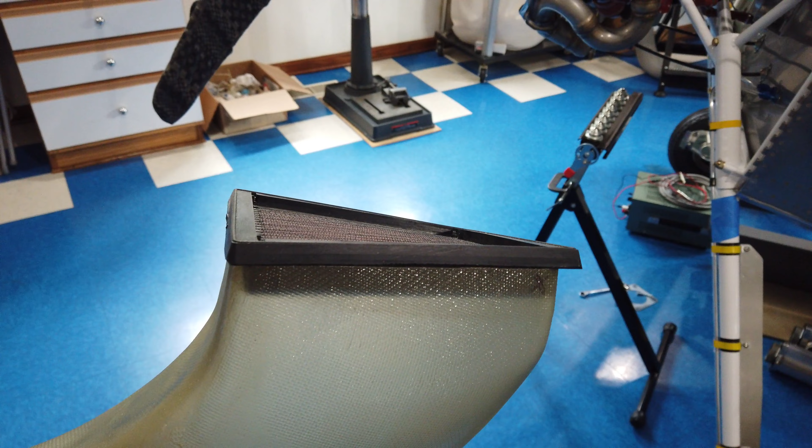So real quick, I just want to demonstrate the weird cuts that are on this snorkel. So I've temporarily just thrown the filter into it, and you can see when I rotate it how that filter sits nicely inside the snorkel all the way around.

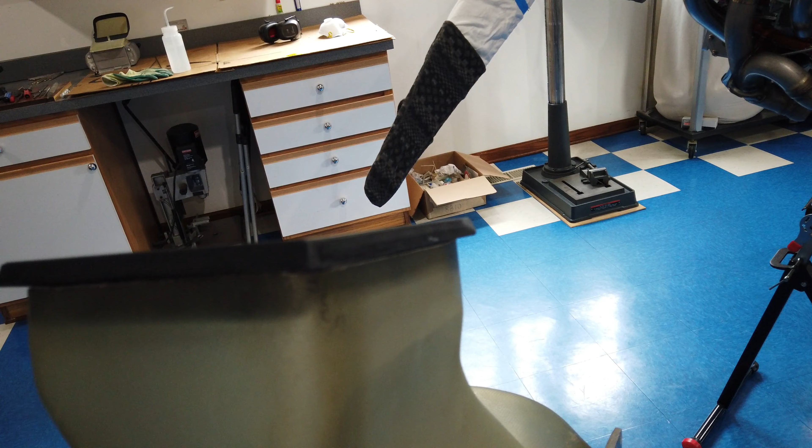But you can also see how obviously the snorkel has not been cut perfectly flat. You can see what I was talking about, how it runs uphill in this front corner, this front right corner right here. And that's because it's matching the bend in the forward ramp. But the filter has no problems contorting itself to match.

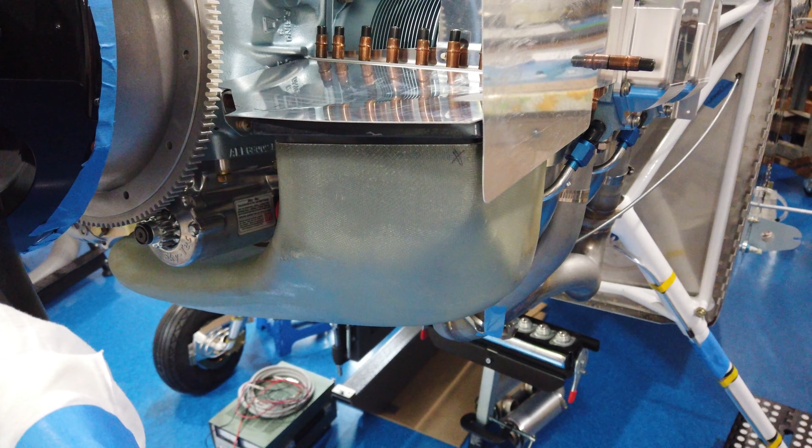All right, so here's an example of how quickly things change. I had just talked about having the snorkel up against the inlet ramp, and then you trace around it. Once you have it traced, then you can come down. The instructions say come down 3/8 of an inch from the inlet ramp, and then you could mark the actual snorkel itself to cut it.

So again, I just talked about having the snorkel in place, and with it touching the ramp, you trace around it to make a mark on the ramp. That's the hole that you're going to cut in here. Once you have that marked, then you can go ahead and trim the snorkel itself down 3/8 of an inch.

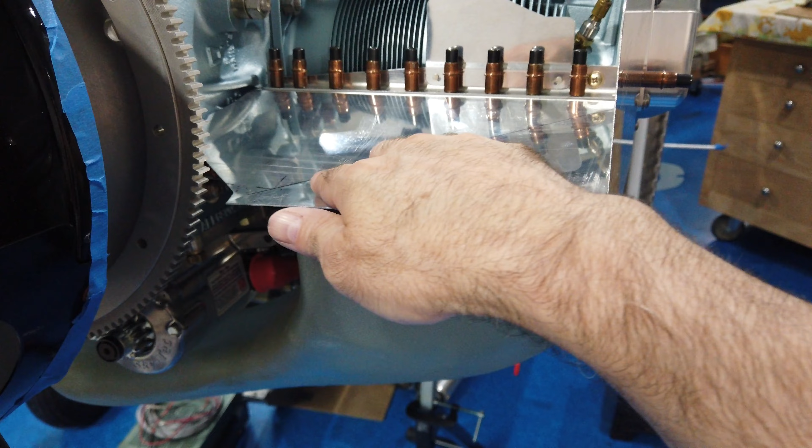But I realized that the filter has to fit inside of this ramp from the top, the entire filter. The top of the filter is going to be flush with the inlet ramp. It's not going to sit into the ramp with the outer edge just laying on top. So that means this opening has to be cut to the outside diameter of the filter.

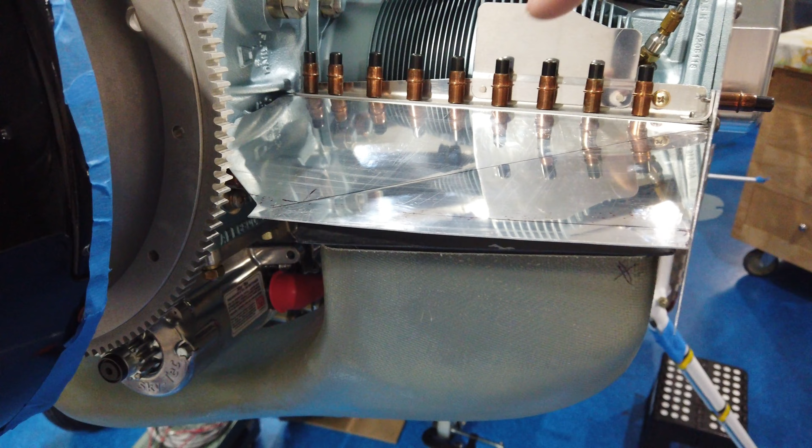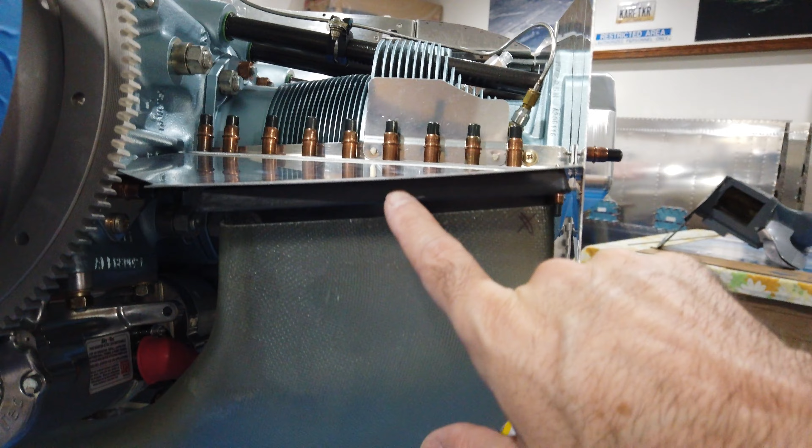You can see from the video that I just shot, the filter sits inside of the snorkel, but this edge of the filter is way larger than the snorkel. So it's this edge here that you have to trace, the filter edge, not the edge of the snorkel.

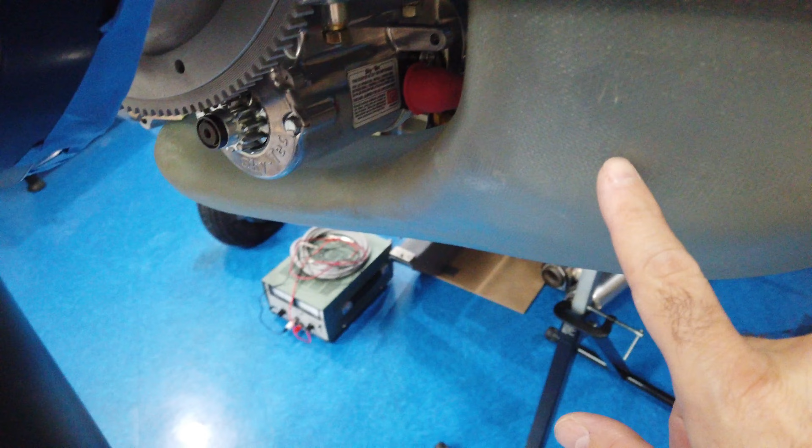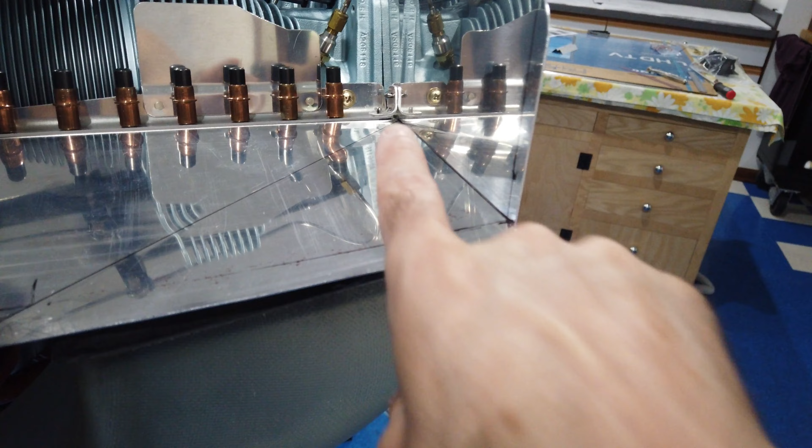So I went ahead and once again bolted the snorkel in place with the gasket down here. Got it in position, got the ramp and the sidewall in position. I keep checking my reference marks that I had drawn to make sure that this is still in alignment. And now I've got the filter installed in the snorkel, and I have it pushed up against the bottom edge of the inlet ramp all the way around.

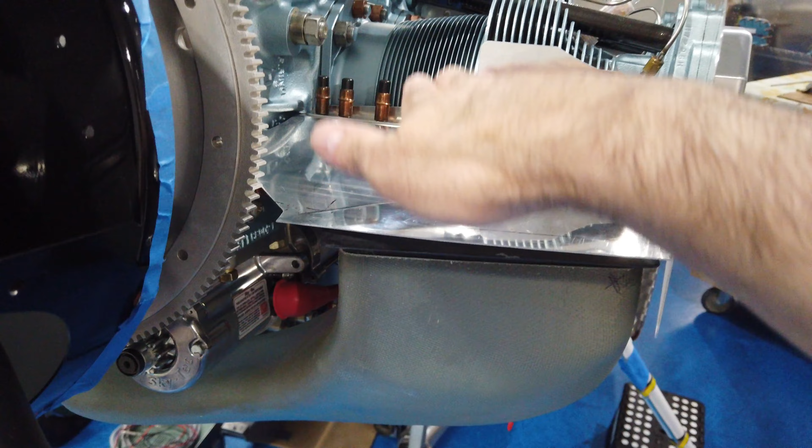And now I'm going to trace around the filter. And that will give me the opening that I need for the filter to sit inside of the ramp.

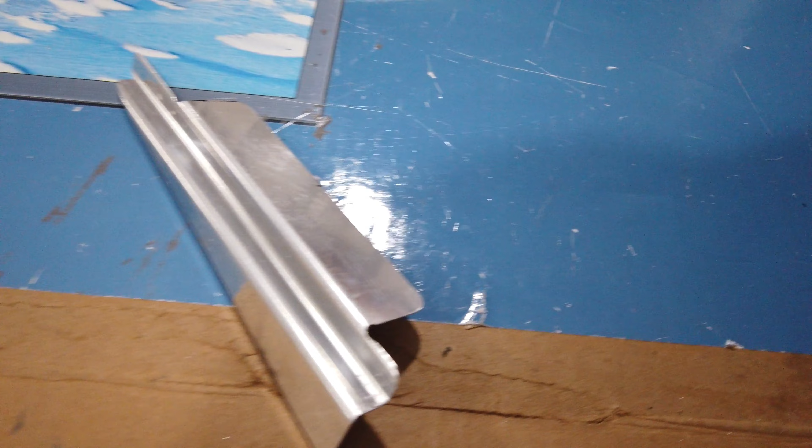Howdy, everyone. All right, working on the snorkel filter bracket stuff, and also a little bit more baffling work, just because they're all kind of interconnected at this point. So is the cowling. But anyway, the kit for the snorkel, these are the written instructions here. There are a couple of pages of written instructions, and there are a couple of photographs, and there are also

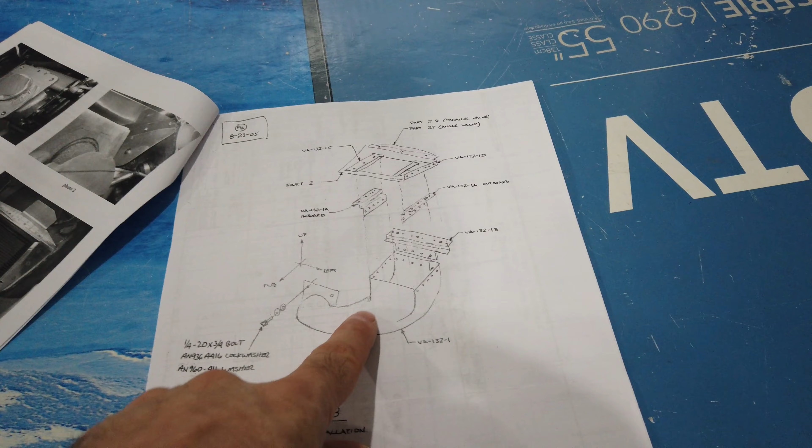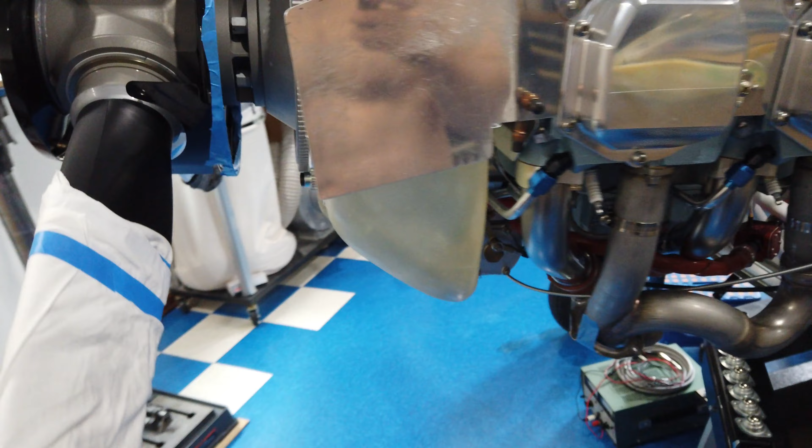a couple of drawings. So like I had said, I was fitting the actual snorkel to the engine, getting where it connects to the servo and where this open face relates to the bottom of the ramp. So I had talked about working on the forward ramp and getting the various angles bent in here so that that will interface with the opening of the cowling.

Once that was bent correctly, then you start fitting the snorkel again to the servo and to the underside of this ramp area. Since the ramp was bent to fit the cowling, now you trim the snorkel to fit the bottom of the ramp. So that's why, like I had showed you in the other video, this has got a weird shape to it. You can see it runs downhill this way.

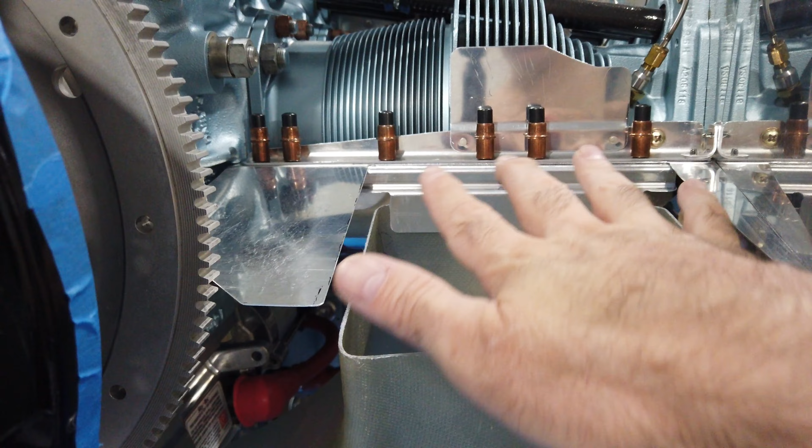From this corner to this corner, it runs back uphill. Across the back is pretty straight. And then from this back corner to this front corner, it runs uphill again. So it's got an odd shape to it, but it matched the contour of the ramp, and that was bent specifically to match the contour of the inlet on the cowling.

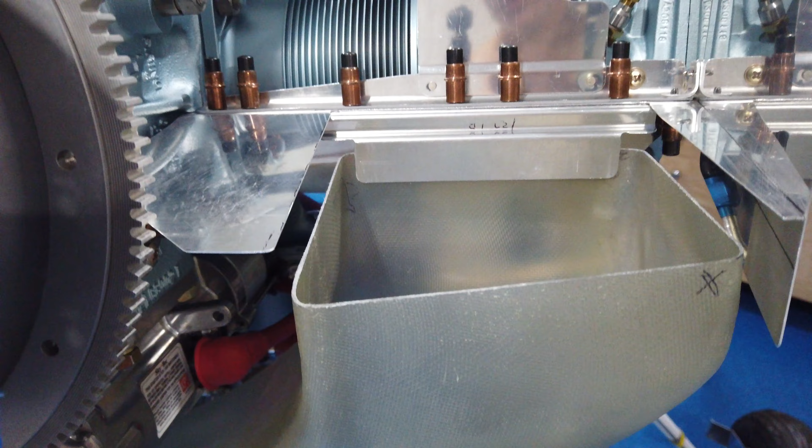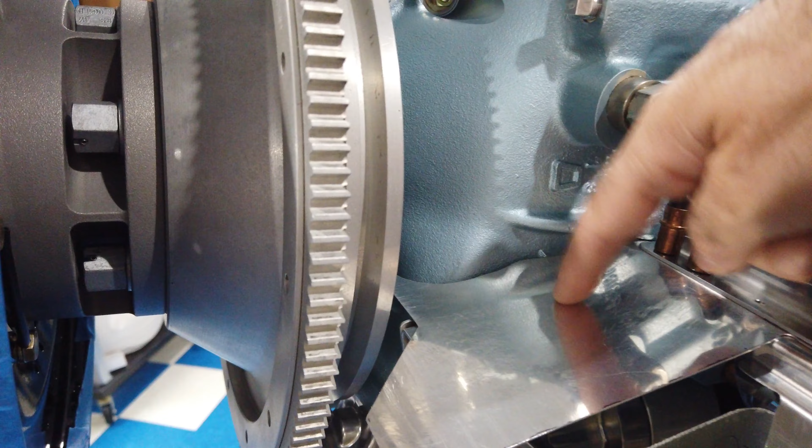But you can see now that I'm starting to fit the filter, that ramp area that you just bent all gets cut away. But you need to do that first because, again, that dictates the shape of the snorkel, and this shape will now fit the cowling, even though most of the ramp is now gone. Don't forget, you've already installed the bracket underneath this piece of the ramp. That's why this is solid now.

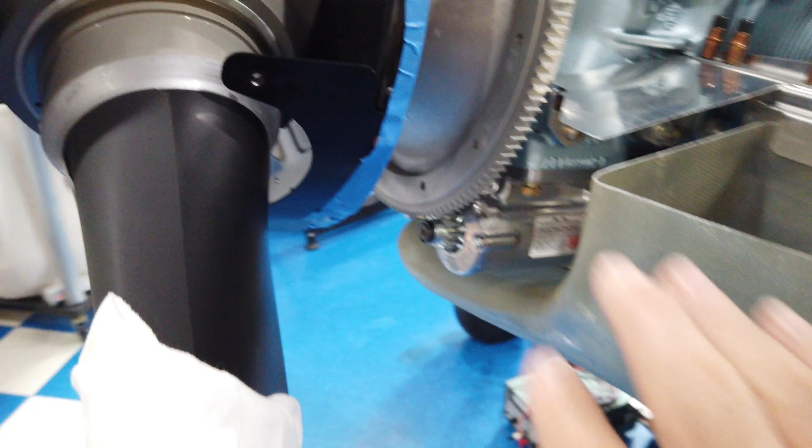It's not attached. I haven't riveted it yet, but again, this gets bent to match the cowling opening, and then you fit the bracket that's underneath this to match the ramp. So this bracket now holds this part of the ramp in its proper location. This has already been cut to its proper shape according to the ramp that used to be here. And then, of course, we still have our reference marks on the sidewall here.

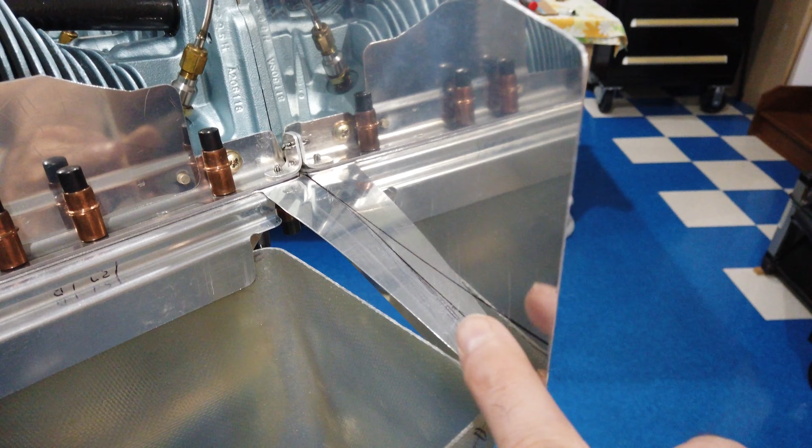Can I get in there? These reference marks here on the sidewall is where you need to line up this edge of the baffles, and that will make sure that this still continues to line up with the opening on the cowling. Don't get rid of your reference marks.

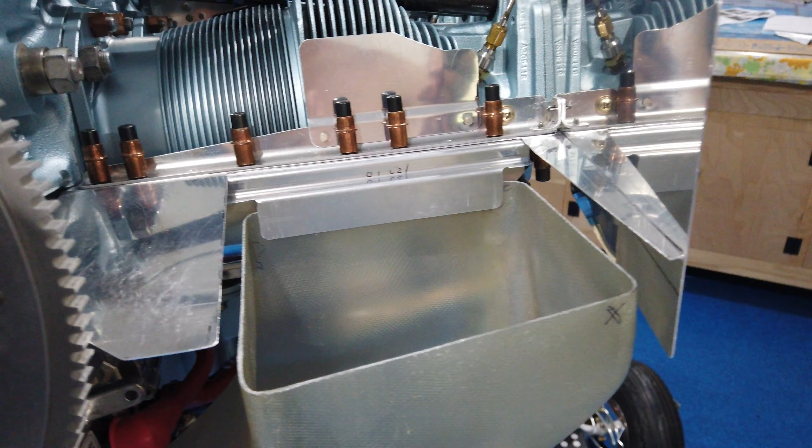So what I'm doing now is I'm fitting the filter, and I'm fitting these brackets. These brackets, they come as a solid piece, more like this and this. And this one is the one I'm working on now, so it's already been cut and shaped a little bit. But you can kind of see the profile. It's basically just a step.

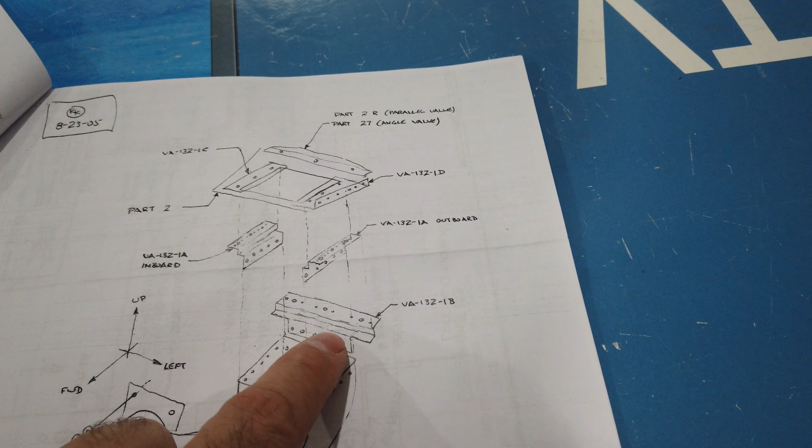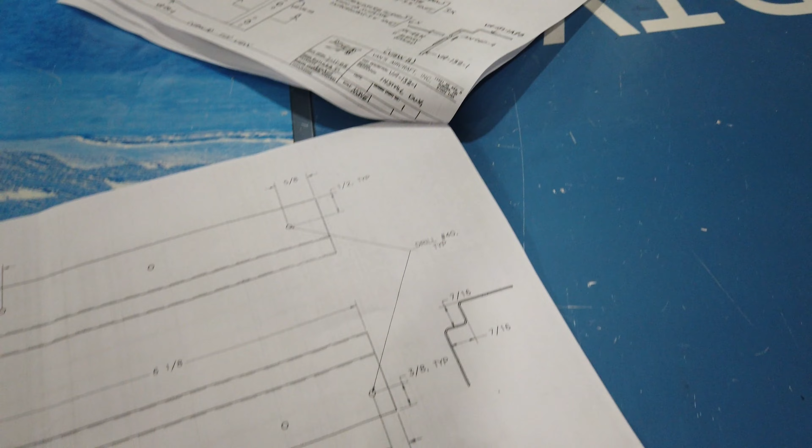And I'm just starting to fit these. These are what the filter actually will rest on. So there's one in the back and there's one on each side. And that's what the filter rests on. There are drawings. Here's another sketch here. These drawings are a good reference. I didn't use these for any real measurement. But they're a good reference.

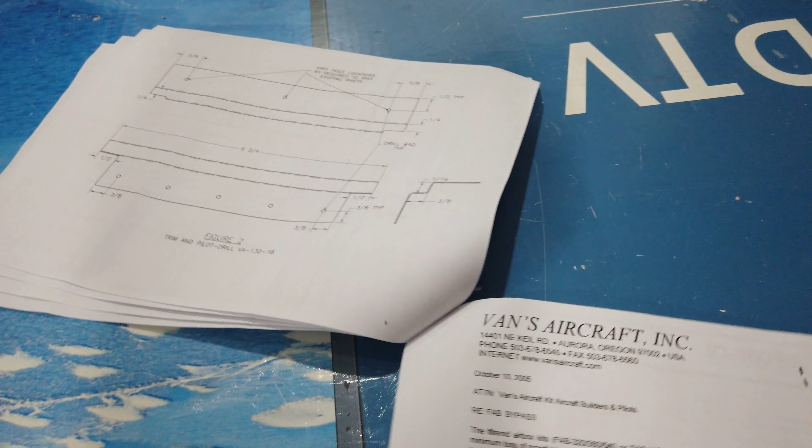And this one, I'm trying to clarify this if I can get these stupid pages separated. Okay, so this is something that confused me for a little bit, but I've got it figured out. If you look at, gosh, this sucks. I should have put this on a tripod.

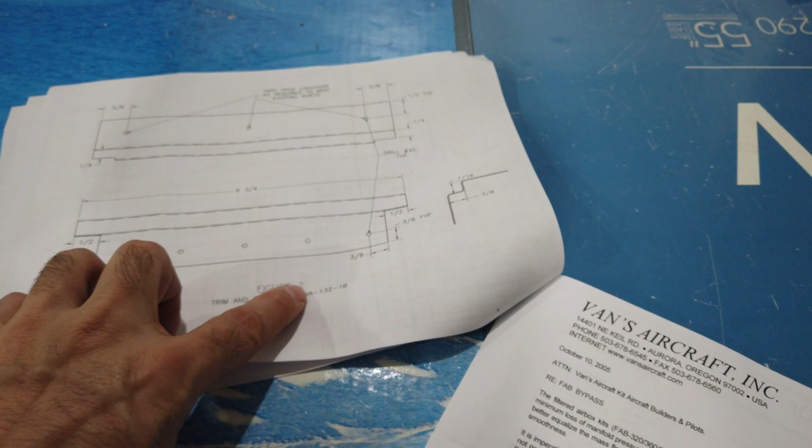You look at this drawing here. You've got a 1 Bravo for this back piece, and then both of these side pieces are a 1 Alpha. All right. When you look at these drawings, figure 2 is for the 1 Bravo. Figure 1 is for the 1 Alphas. What you want to make note here is the profile. So here's a profile sketch.

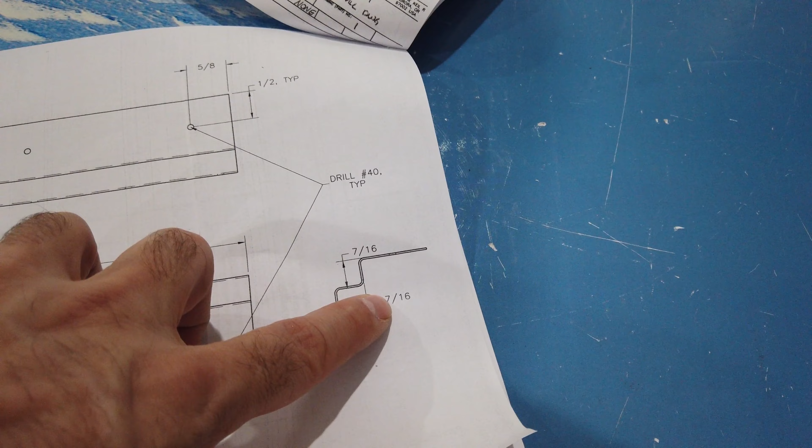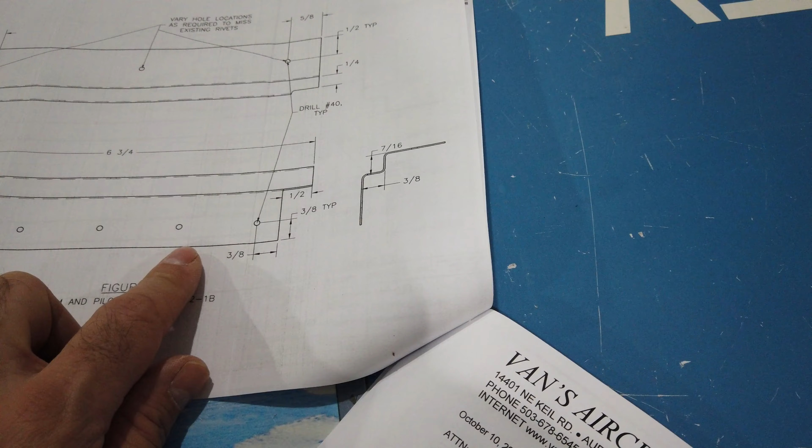The 1 Alpha piece, the step is square. It's 7/16 by 7/16. The 1 Bravo piece is not. It's 3/8 one dimension and 7/16 the other dimension. Make note of that and make sure you orient this piece with the 3/8 and the 7/16 correctly. And that's shown here. So this lip here, this is the lip that goes down inside of the snorkel. So the 3/8 lip is what the filter actually sits down on.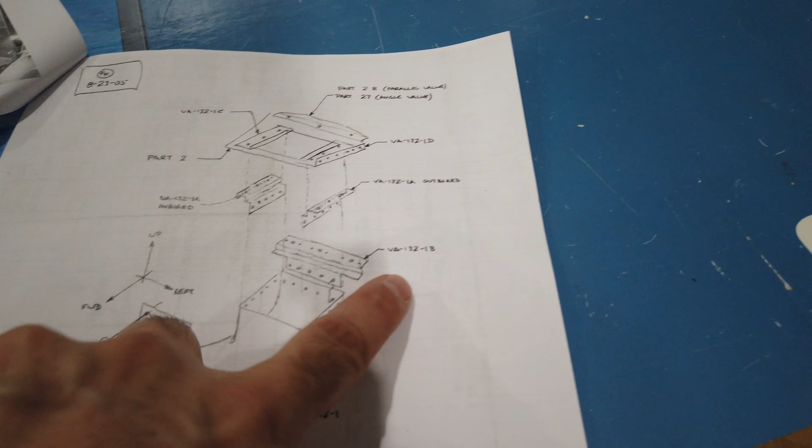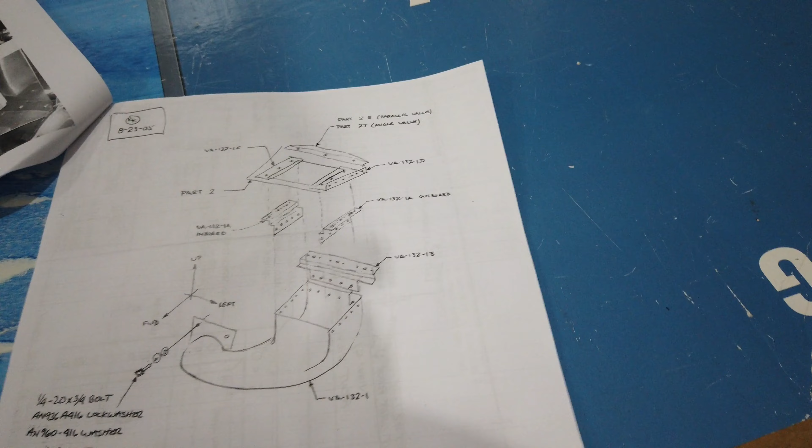All right. You can kind of see that if I go back here. So this is the 1 Bravo. This edge here is what fits down inside of the snorkel. And then this edge of the step is 3/8. That's what the filter actually sits on. And then the back wall of that step is 7/16. All right, so pay attention to that when you're cutting up your pieces.

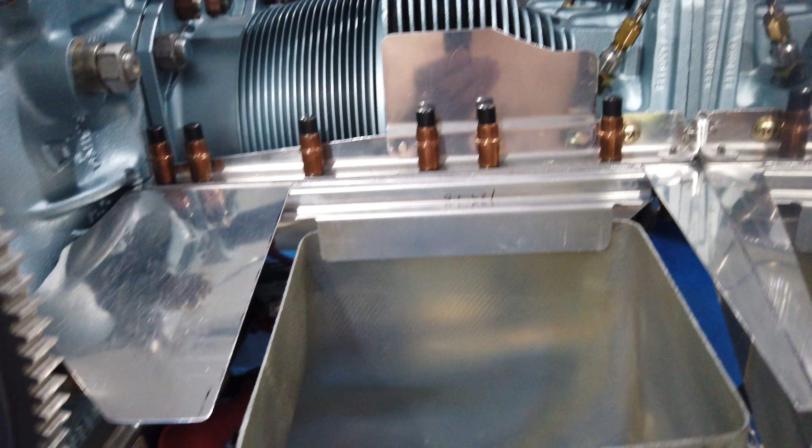So that back piece I've already got in place. You can see it there. I've made use of the existing rivet holes across the back. I'm going to put 4 screws right where these clecos are. This will be a screw, this will be a screw, this will be a screw, this will be a screw. The idea is that this piece and the 2 side pieces that I just showed you, those get riveted to the snorkel. So in order to separate all this, you have to be able to unbolt it around the perimeter, and then this will drop out of the way, and then this can come out.

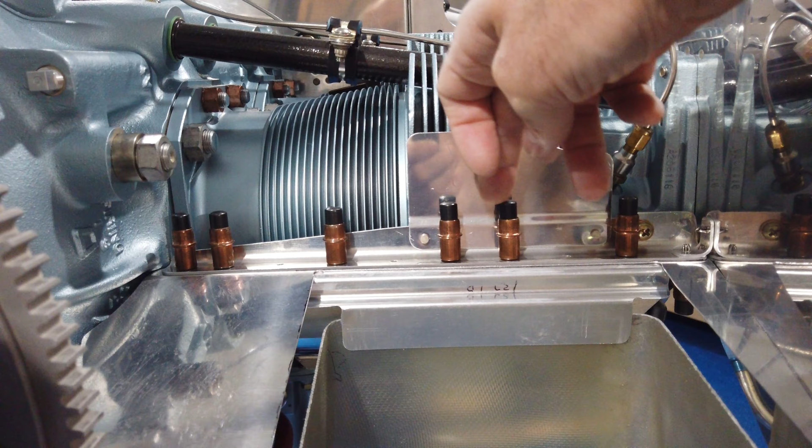So rather than drill new holes for screws, I'm just going to go ahead and make use of existing holes. I'll put nut plates in here, and then I'll just have the 4 screws. The holes in between will be rivets, but there'll be flush rivets on the bottom side. So when I screw everything together, there's nothing interfering. So the back piece is done. Obviously, I've got the opening cut in the ramp. And now I'm working on this side piece, which is the one that I have here.

And this is the same idea. This piece will fit inside like this, and then it will fit in this back corner, something like that. That's what I'm working on now. This is very tedious. It takes a lot of time. It's just like everything else, cowling and baffle related. There's a lot of assembly, disassembly, reassembly, disassembly, a lot of tweaking.

Everybody's situation is going to be different. There's no exact measurement where the snorkel needs to be, where this hole needs to be cut out. All that's going to be specific to your airplane. You have to go incredibly slow and think during the entire time that you're working on this, think about baffle sealing. You want everything to be nice and sealed when everything is finished.

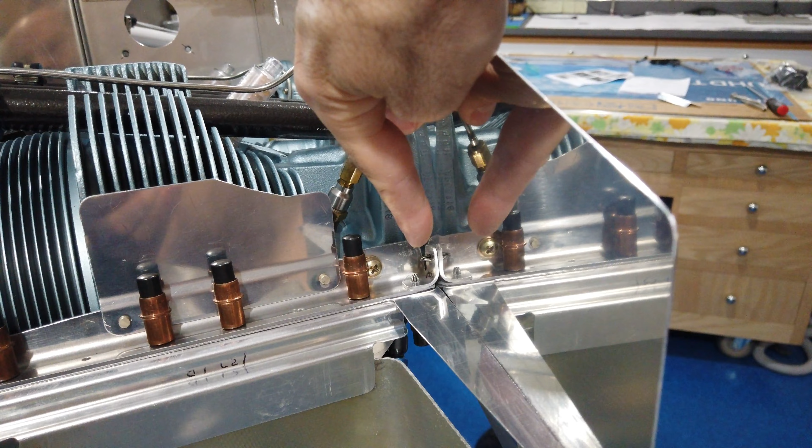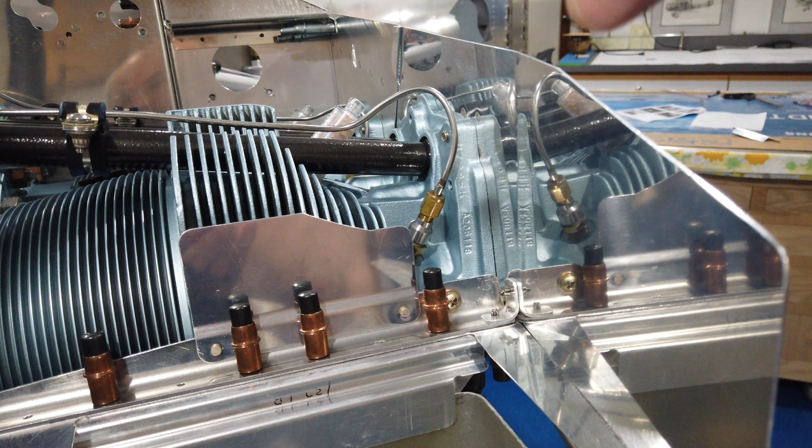I think I've talked about this before. This back corner here is a good area to have a lot of leaks. There's a lot of components that come together into this corner. And you want to make sure you're thinking about baffles and efficient baffles and having everything sealed. So when you start working on all this, make sure that everything is checked and double checked and things are nice and smooth and square and tight and are going to be able to seal the baffles when everything is complete. And use your reference marks like I talked about here.